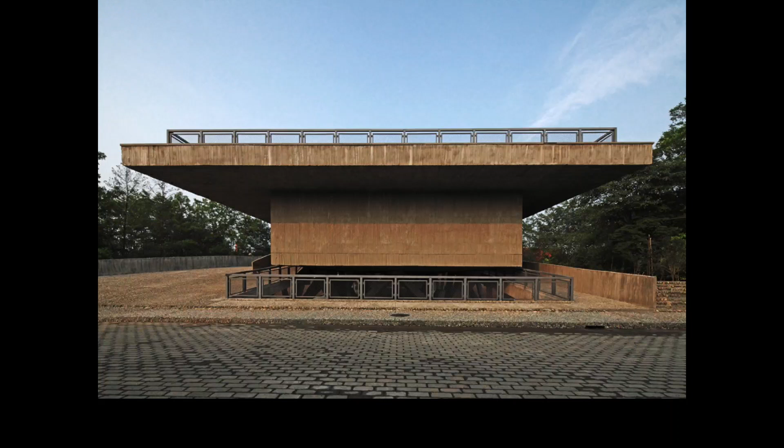The reason I'll show—from all these things, I studied first as a student and as a teacher later on. I thought maybe with this museum for the Cultural Revolution, I could combine these qualities, because the local construction force is very unskilled. This is in the province of Sichuan. And so I took quite a bit of a risk to see what kind of a quality of concrete we were able to achieve.

So it turned out a bit like this. Very, very rough. I haven't seen the Lina Bo Bardi building in real life yet, but I've seen some Brazilian concrete buildings. So it's actually pretty similar. And of course, the raw power of the concrete is being brought out.

But also, as a museum, I was hoping that it would get the kind of feeling people have towards the Cultural Revolution onto the surface of the building. And then the formal language, as you see, has the kind of classical spirit to it. So I hope that a piece of architecture like this is informative, so that when people come to see the content of it, they also start to understand how history is being embodied in some way in a building like this. So, and then this is the drawing.

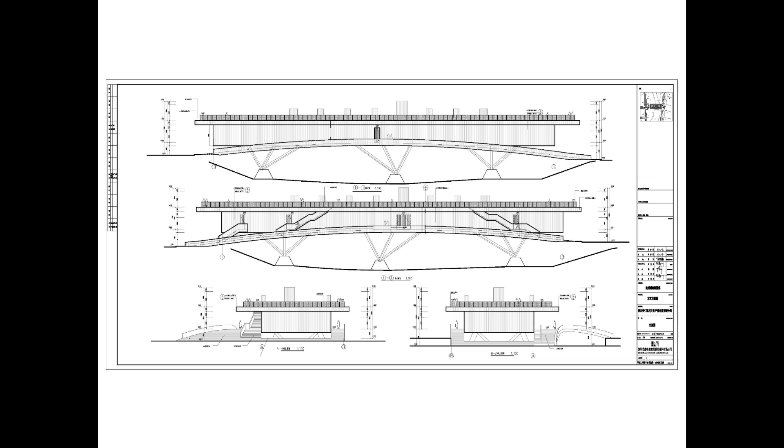It's, as you can see, a bridge. So it's part of the city infrastructure. We did the master plan as well. So you can see, this is underneath the bridge. Here actually is for pedestrians coming or going from both sides of the bank of the river, and then that's how you get up to the rooftop. Eventually, it's going to be a sculpture garden there, and then you go over to the other side.

So underneath the bridge, very rough structure. But we thought as a museum using this sort of classical architectural language, so this notion of monumentality is perhaps still there, however subtle.

You can see that the interior, in this case, is not finished. The exhibition at that point was not yet installed. So this is something we all know, and it has become a very important reference for my work. So this is the Farnsworth House.

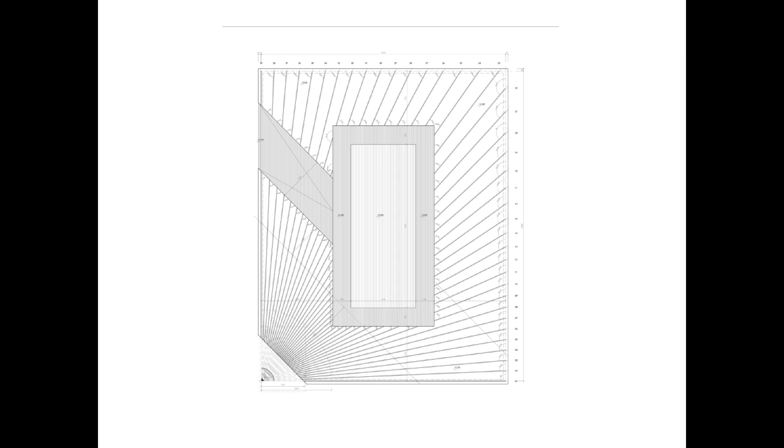So we did an installation project for Audi, the German car auto manufacturer. So we decided to play up reflections along with transparency, to really stretch these properties of glass.

What we did is, this is really fuzzy. So here, this is the car. So basically I have all these glass plates organized in such a way that it would give you a result, like this. So of course, the idea is not so much about showing off glass, but to try to simulate the illusion of movement with a static car.

So this motion and static position becomes really the essence of this visual game, so you can see more of it. So that was an installation.

So with that, I'd like to come back to Farnsworth's house. Another thing that has interested me for a good many years is the fact that this one, as well as the other really famous glass house, the one by Mr. Philip Johnson, were in open landscape, so there is no problem with privacy.

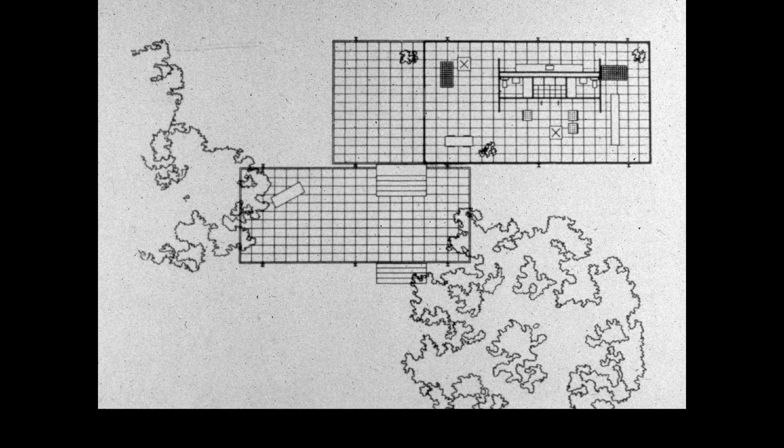Mies van der Rohe's glass house, not only that, as we know, had a very thoughtful way to organize the tectonics so that there's no corner issue and so on. So I'm sure everyone here knows all those stories. But what's also pretty obvious in the plan is these core bathrooms and utility room divide this open space into four rooms. They're open rooms, but there are four areas.

They are connected, but also they are self-defined to the point that it's clear, you can designate a particular function to it. And then when you go to Mr. Johnson's house...

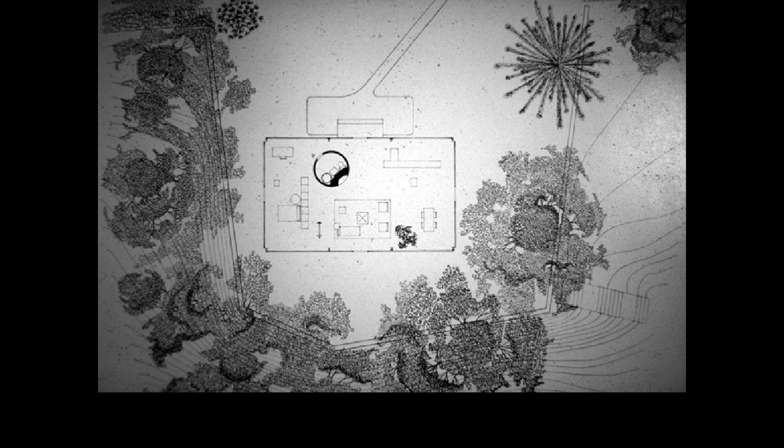The core is placed pretty close to the door. Here, if I remember correctly, it's about 80 centimeters, less than a meter. Here it's about 50 centimeters. So it doesn't really divide the space, although there are different functions. And actually, from what I heard, he used it more as a living room for reception, for party, to really have a full, everyday routine there.

Perhaps it just wasn't as suitable, because these functions, the kitchen, unlike Mies's kitchen, is so much part of the room. This is more just a pantry, for catering and so on. And anyway, what's interesting is the possibility for organizing spaces that is totally open, but in such a way that it accommodates different functions.

And Johnson's glass house is also super interesting for a different reason. So maybe the glass house could not be a self-sufficient house altogether. A lot of people here know more about this. This is my trying, doing some detective work. I could have gotten onto the wrong track altogether. So what's interesting, of course...

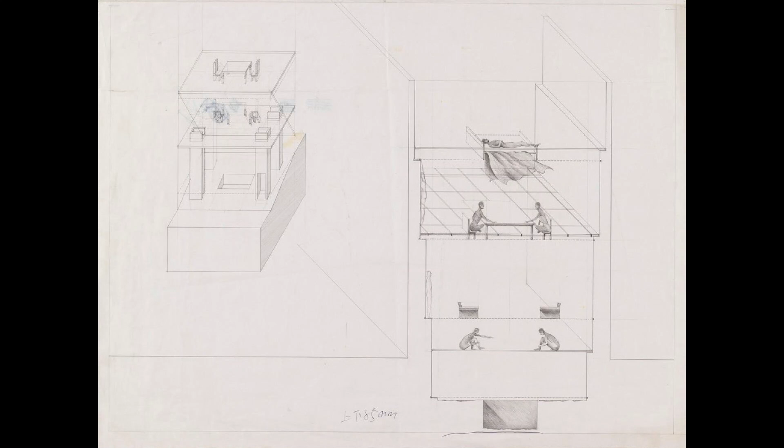His name is Liu Ling, actually, I forgot to say that. So I started to draw Mr. Liu in the form of the dancer in my drawings, doing these everyday rituals, and then I did more of it.

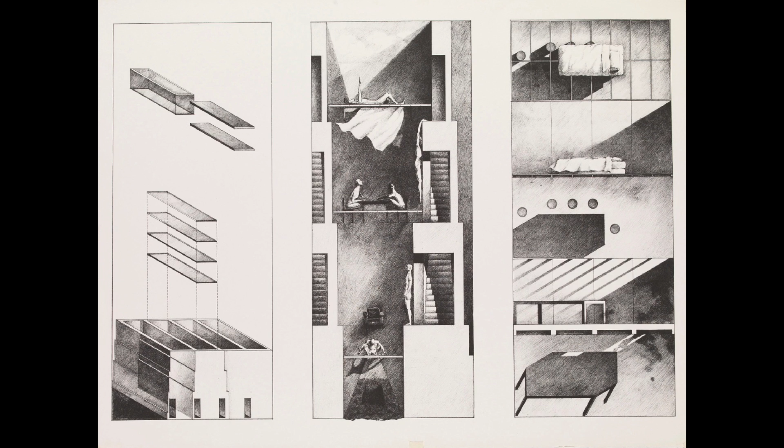Here is going from horizontal to vertical, with this daily ritual of talking, eating, meditating, and so on. So the building started to take form, maybe as a house for Liu Ling, or for the dancer.

So you can imagine a person standing on the ground, not touching the earth, and then looking up at the sky, as Liu Ling probably would, thinking of how his architecture would enclose him.

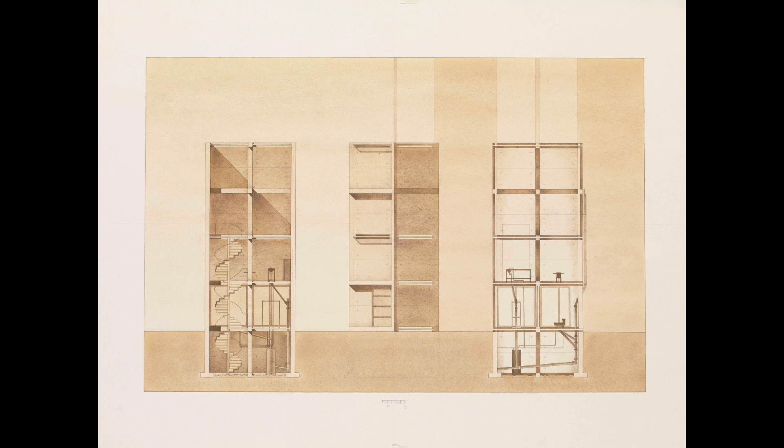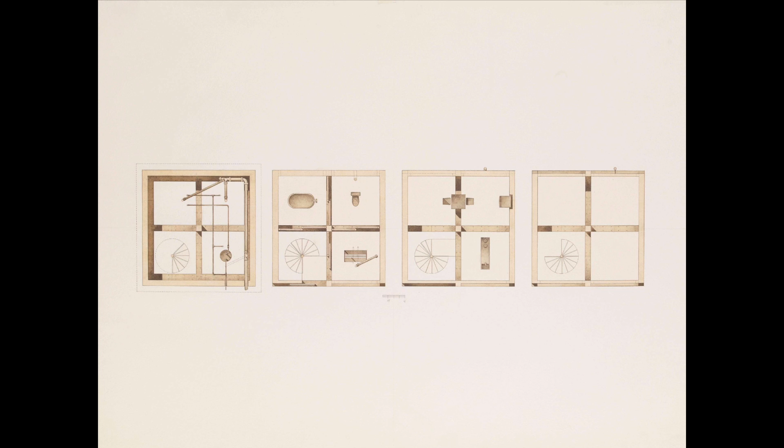So, more architecture drawings, and you see a section on this side, both sections, the day section and night section, day elevation and night elevation, and plans from the basement. This is a heater, ground floor, with specific utilities, the living space, and eventually a pure space, perhaps for a spiritual life.

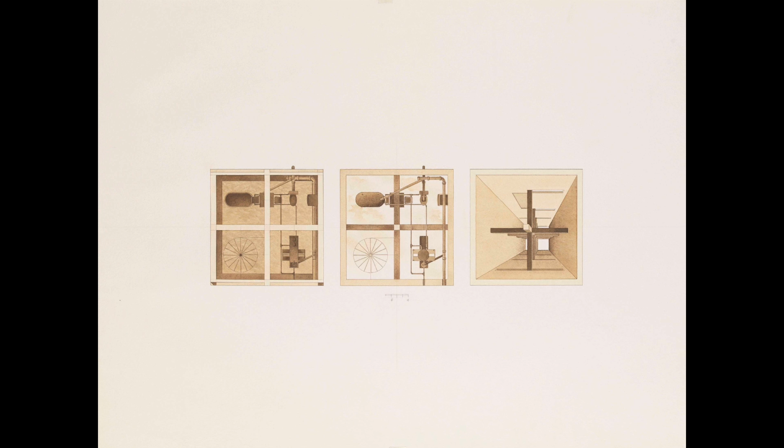More drawings of that, and all the utilities and equipment in the house started to connect into perhaps this machine for living. And then last year, the house was built in Shanghai, as part of the Shanghai Westbund Biennale.

It's now used as a guest house for people, especially artists and architects visiting Shanghai, participating in different events there. So on the outside, as you saw in the drawings, it's like this, and here's the door, right on the waterfront.

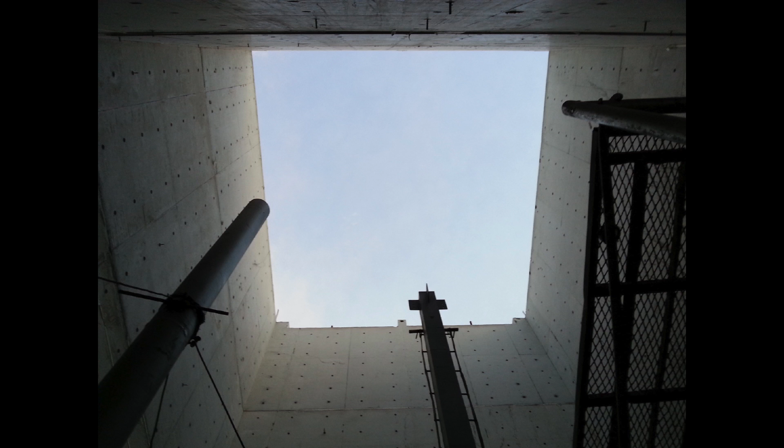So, a vertical glass house. On the outside it is rough textured concrete. On the inside, during the construction, of course, it's very important, it opens to the sky, popping off.

And then when it was finished, I stayed there for two nights with my wife. The house, if you remember, is for one person, but my wife wanted to come, so she came, and now there's a family with a kid, a little daughter, who wanted to try this out too. So somehow the capacity of this house is expanding all the time.

This is a picture I took when I was awakened by the foghorn of ships on the river, and then started to see the change of light.

And then at night, this is the moon, by the way, it's not a light bulb.

So now, of course, you started to experience very different, literally, perspectives of the domestic programs.

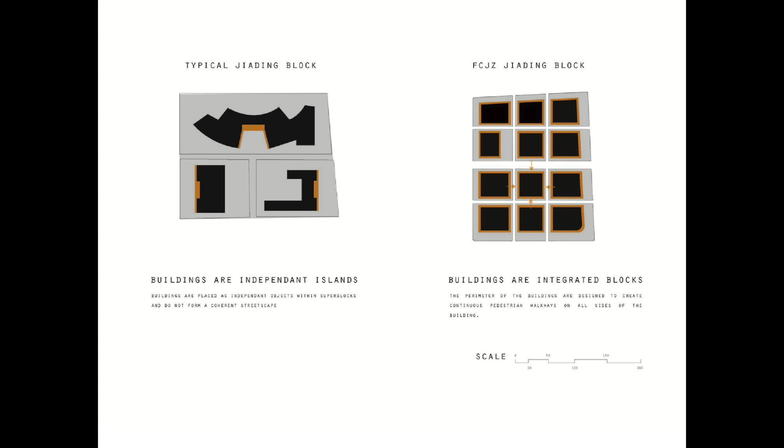So there are inner streets, actually private streets, I'll put it that way. After a lot of studies, we decided maybe for Jiading, a satellite town outside Shanghai, the appropriate size of a block should be about 40 by 40 meters. So that's how big our block is—that's how big a typical block is.

This is actually not only for Jiading—all over China you have these huge blocks. For Beijing, the starting point is 600 by 600 meters. That's the reason we have traffic congestion all the time, though there are other reasons too, like too many cars. But that's a reason. So we did further studies about the block.

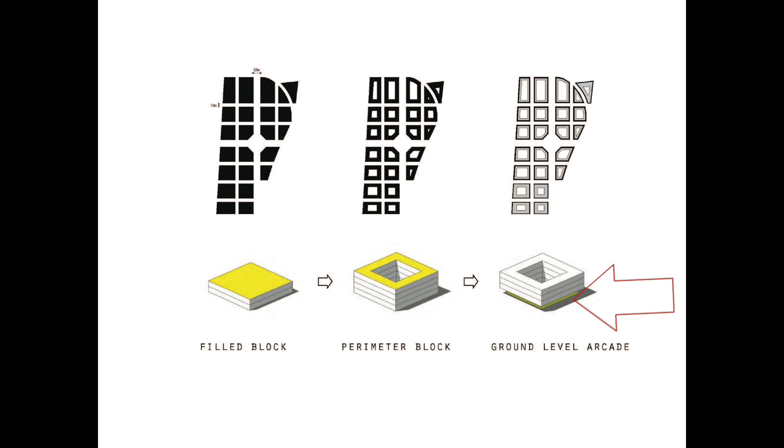We didn't do anything progressive, I'm afraid—we studied older cities. So a perimeter block, and it's also very important to have a covered walkway for each block. Then we ran into a problem: the density of certain blocks became higher while we were doing the design. So we decided to do a tier design—four small blocks on the bottom with a donut building on top, so the FAR was able to be higher, and the program allowed us to have the donut for a hotel.

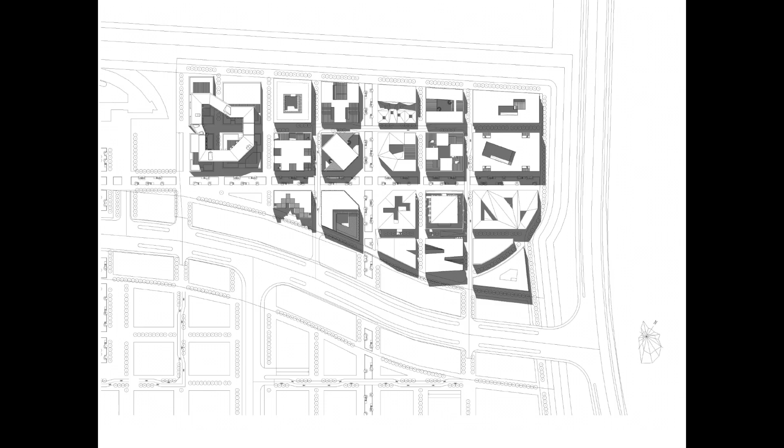This year, all these buildings will be under construction, and this one is almost completed. So the idea is that this is a much bigger project—perhaps all the projects I presented previously, combined, would be smaller than this one. But the point is still thinking about something small. Literally, it's the size of the block and the size of the street, but conceptually, it's about always staying closer to the ground, closer to the way people live. I think the smallness project hopefully would extend in such a direction.

So that's the end of my presentation today, and thank you very much.